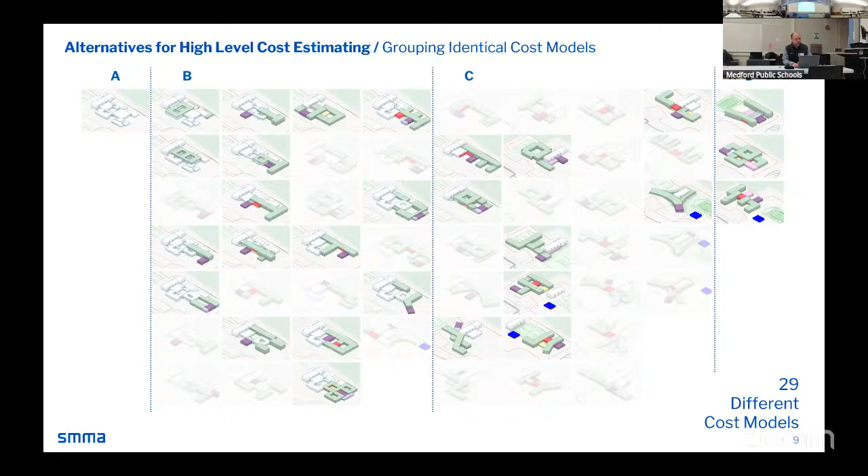We're not going to revisit the entirety of that meeting from last night—that's not the point of this discussion. We just wanted to share that these are out there. We can circle back if people are curious about any aspects as it pertains to this advisory team, but there is some connection between what we talked about last night and what we're going to discuss here.

All right, so I'm going to turn it over to Michael.

It's always good to try to remember what we talked about last time. There's been a lot of meetings between then and now, so it's important to recap. We collected all the information provided, some really good notes, and synthesized that down into a few themes. It's helpful to take the range of things we talked about—from what color the brick should be to who we are as a school, and everything in between. Word clouds are helpful.

The first theme we heard a few times was to do more with less—that we should be looking at timeless design, timeless materials, over trendy things that are maybe flashes in the pan, and that we should embrace simplicity, making choices that are beautiful, materials that look good and exude a certain comfort and excitement for people using the building. On the flip side, looking at life cycle costs and maintenance, which plays into the long-term value of that material and keeping it looking good, not beat up.

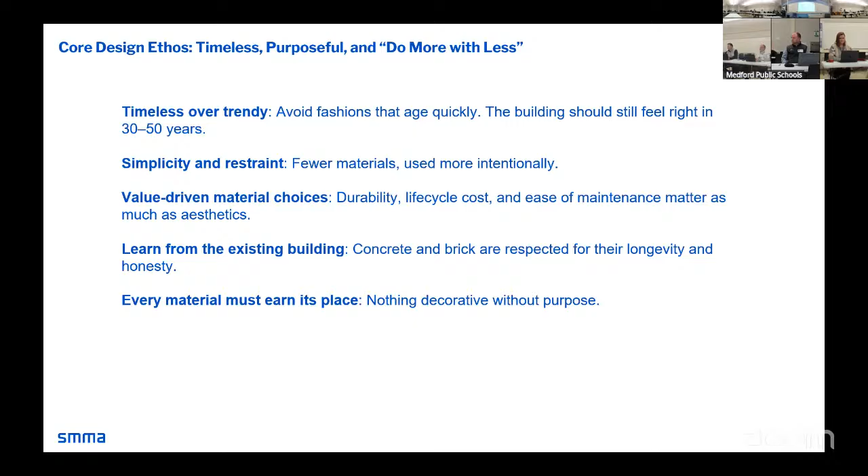The second broad bucket was materials, material health, and sustainability. Many people mentioned going after red-list-free materials, materials low in toxicity, like no PVC or vinyl for the project, stating that occupant well-being and health is paramount—both the physical and emotional side of that.

Maintenance will be a big theme, especially down the road. We're selecting materials for classrooms, hallways, and things like this with movable furniture—it all gets down to how well that material holds up over time, avoiding things like waxing floors, and working with custodial staff to understand how the building is cared for over time.

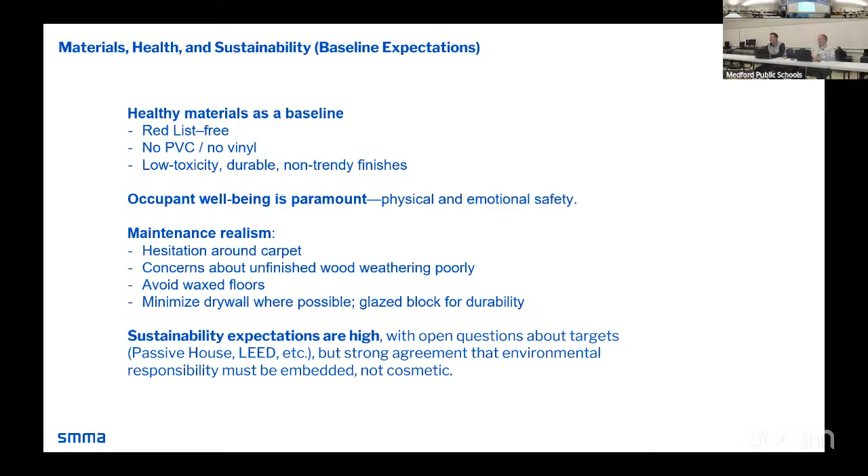Sustainability has always been a very high priority for this district and this school, so that goes without saying. We're investigating scenarios like LEED, passive house, or living building challenge. That will all get discussed as we start creating buildings and sites.

Next big theme here was about the civic role of the building. A lot of it was about what we were just briefly talking about before, the clarity and the site circulation. Do people intuitively know where to go, or do they get lost the moment they make a right turn onto the site?

Some thought that Medford as a city lacks public space, and saw the school, the flagship, as a great opportunity to help fill that gap. Of course, there are a lot of amazing programs here that draw people in, whether it's the pool or the fields.

With the new auditorium and performing arts portion of the project, that's not hidden, but very much part of the public realm, celebrated. These civic spaces are, I like this word, beacons in times of crisis. I might talk about that a bit later when I discuss the civic architecture and its response to crisis.

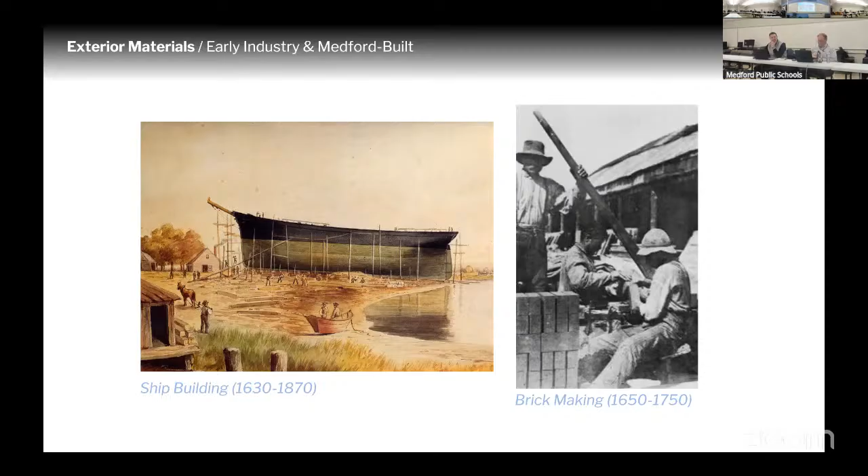Now we'll roll through some civic buildings, organized roughly by era. I pulled out a handful that were mentioned last time, plus some new ones, and some I drove by on the way up here, which was kind of cool.

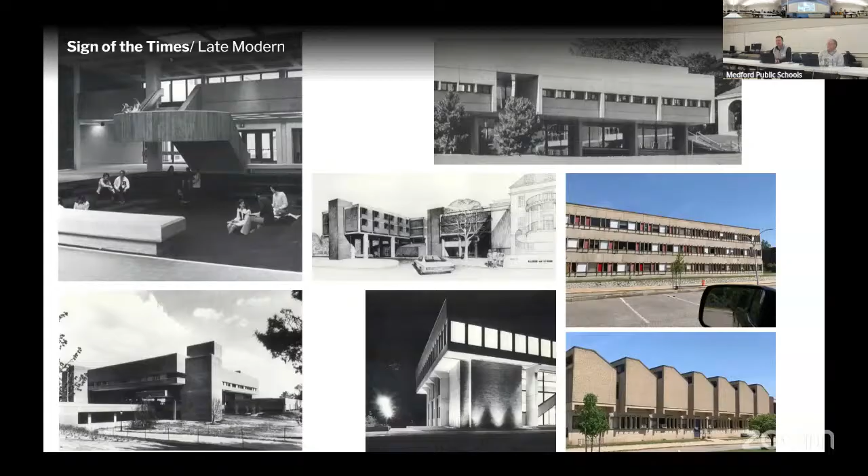There was a really good spread in the yearbook from 1970, a little photo essay that was put together. I'll read through some of these lines: 'As the natural terrain was reshaped by dirt, concrete, earth-moving machines, a man-made beauty evolved that rivaled its own natural order.'

Well, beauty is in the eye of the beholder. 'A world of coherence and order that even nature could envy was excitedly emerging. Surely brick and mortar cannot live and breathe.'

I mentioned architecture responding to what's going on. This is like the Vietnam era, there's a lot of craziness going on. This building, and the previous building had the fire, so a lot of chaos was going on during this time. So probably the school building committee at that time, the architects, were in a search for order and clarity, and that's certainly what they did here.

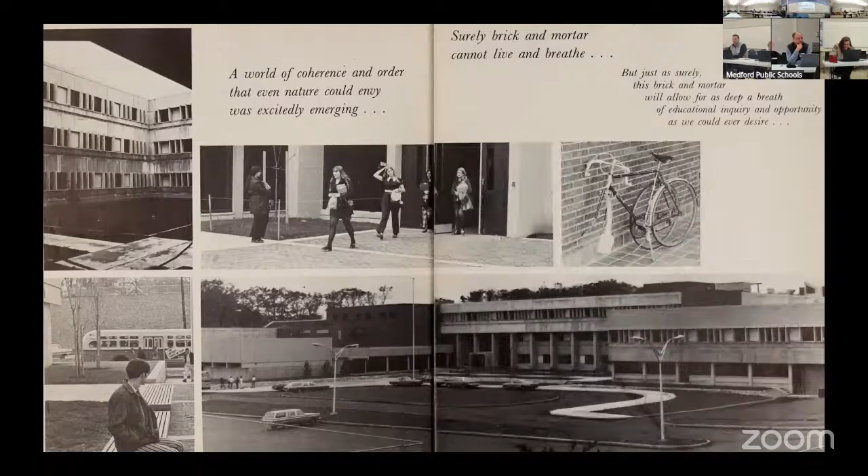From the way the corridors are laid out, to the way the buildings are nicely placed together, pretty regular courtyards, and even down to the system of the facade, there were definitely rules that were applied, whether it be how we treat stairs, windows, or sunshades. Everything was orderly and in control.

This quote by Marcus Aurelius, I think, basically says that, and I think Churchill has a similar quote, that we shape our buildings and our buildings shape us. So that's kind of what we're embarking on: the environments we create and the materials we select all have an impact on the occupants, how they grow, how they learn, and how they connect with each other.

So now is maybe a good moment to pause. Just to throw out this question: having seen some of the civic places, is there a connection between those places and this place? Is there not a connection? What does it mean to be a civic building today?

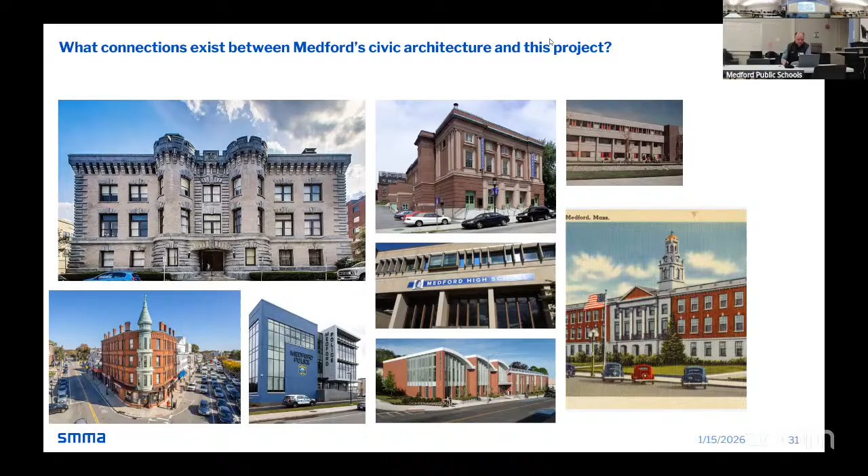As we think about what materials may end up on the exterior of the building, we need to keep in mind, first and foremost, that we're designing and building buildings with a 50 to 75-year lifespan. So at that initial point, it's going to preclude the use of some more residential scale products. We're not designing vinyl siding on school buildings. We're probably not even designing natural wood siding, given the upkeep associated with them. So these are a collection of typical materials.

Brick is certainly one of them, and it's found in the city, as we just showed, and in the district. It's not to say these are the full collection of materials out there. We'd love to hear about other materials anyone has experience with or interest in, that we can investigate and move forward in the process.

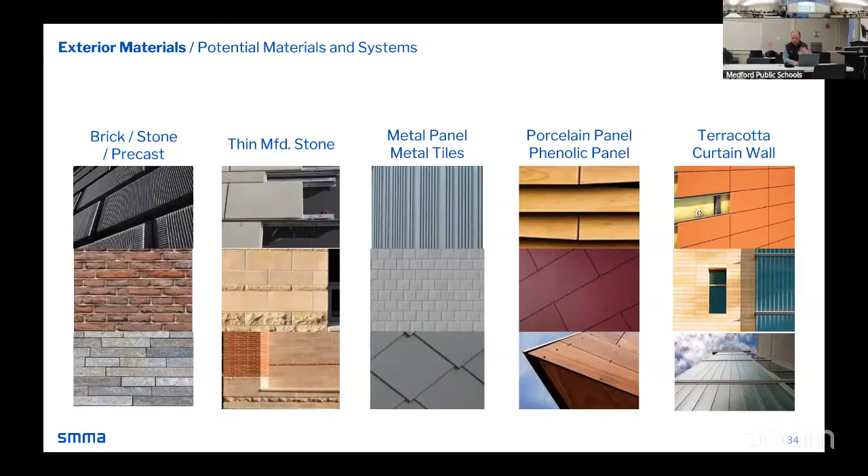And again, these are just the opaque materials. We haven't even got into the topic of fenestration and what the things that we look through are made of.

But sticking with fenestration -- yeah, fenestration, which is again a fancy word for window, essentially. So maybe I'll try to stay on the simpler side of the terminology, but architects, we like to trend into all the fancy words that we know, and I'll try to check myself on that. Now I know how people feel when I'm talking about technology. It's similar, yes.

So I talked a little bit about the cost spectrum in terms of materials, but also the durability of materials that we go through in terms of how we can plot where different materials fall on this range. So we have durability as our range on the top left there, and then cost running across the bottom.

You can see that masonry or brick has that interesting position of being extremely durable and having a lot of longevity to it, and also being on the lower price point. And that is the very reason why you see brick on so many public buildings, because it fits into a lot of beneficial categories that way.

There's a lot that we can do with brick. There's a lot of creativity that has been investigated over the course of history with that. So it is a material that can be considered as part of the exterior palette as we move forward. But again, you get a sense from looking at this where some of those other materials fall in terms of that spectral graph that we've been looking at.

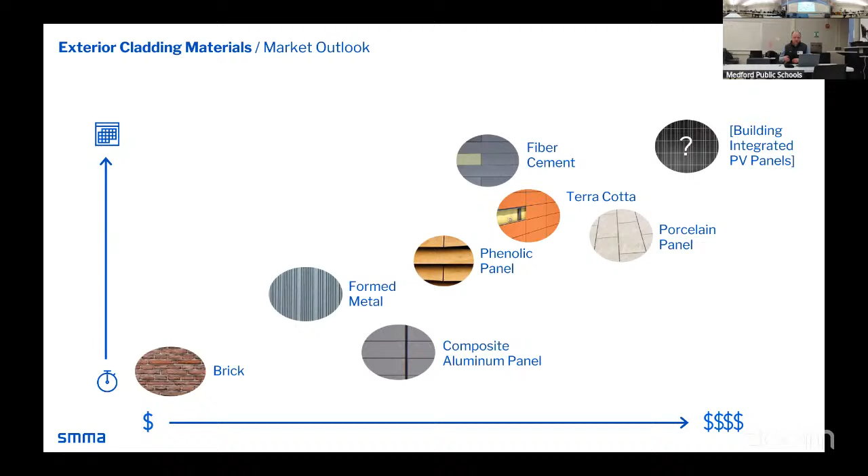And the one in the upper right-hand corner is maybe a little bit more interesting in terms of building integrated photovoltaic panels or solar panels actually applied to the face of the building. We don't see that too often around in terms of public school buildings in Massachusetts, or really too much within the country, because it is at the upper end of both the first cost investment of what goes in there, and also in terms of durability, it is not going to last quite as long as an active technology than some of the other materials.

But saying the lower on the graph, the more durable? Correct, yeah. And then to the right-hand side, being more expensive.

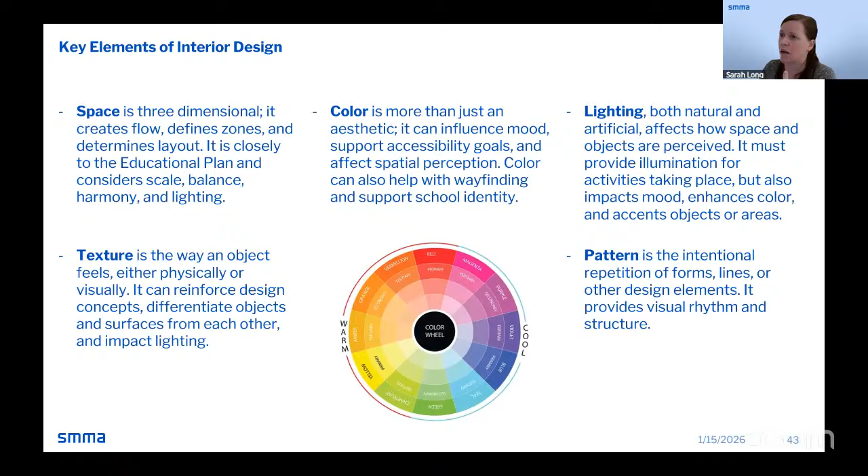And it also has a big impact on color and mood. The other two I wanted to touch on quickly - often overlooked, but a layer that can really make an impact - are texture and pattern. Texture can be physical touch or something you perceive visually. Pattern can be a repetition of lines, but it's also a rhythm that you can feel within the space. That's something we'll look at as we move into the next slide and the goals we're looking to explore.

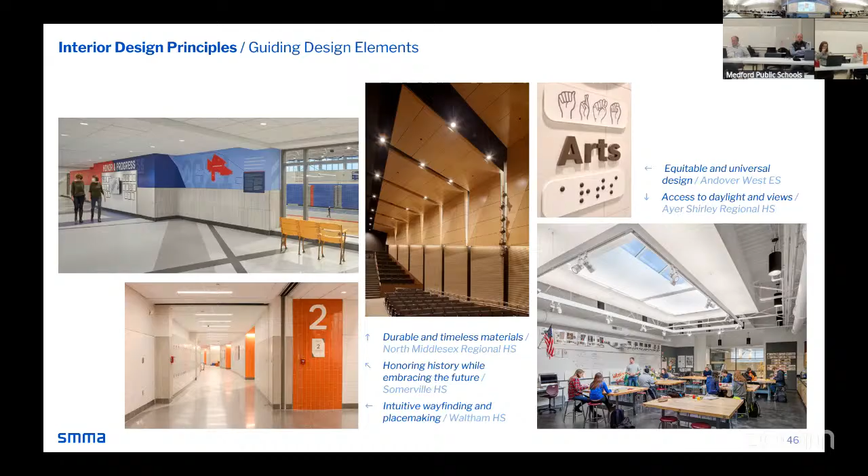Well, jumping off what you said at the beginning about doing more with less and not having anything decorative without purpose - I'm looking at some of these slides, and the celebrating diversity one is absolutely beautiful, and there's one on the next page, the hallway in the top left. They're beautiful, but I'm thinking of students with visual impairments, and with a lot of different colors and patterns, coming in and feeling sensory overload from just a visual perspective. Going back to the celebrating diversity slide, those colors are gorgeous, but I'm also looking at those white tables and how they blend in with the floor. If you're distracted by all that color above you, you could walk straight into the table.

That ties in with the wayfinding too - that helps the same with the floor, making it intuitive. So that's one thing that jumped out at me, keeping that in mind.

For sure, that's great feedback. Definitely, I think finding that balance of making things comfortable for everybody, and to your point, being intentional about where the accent colors are, what the contrast is, and actually making sure we are achieving that goal.

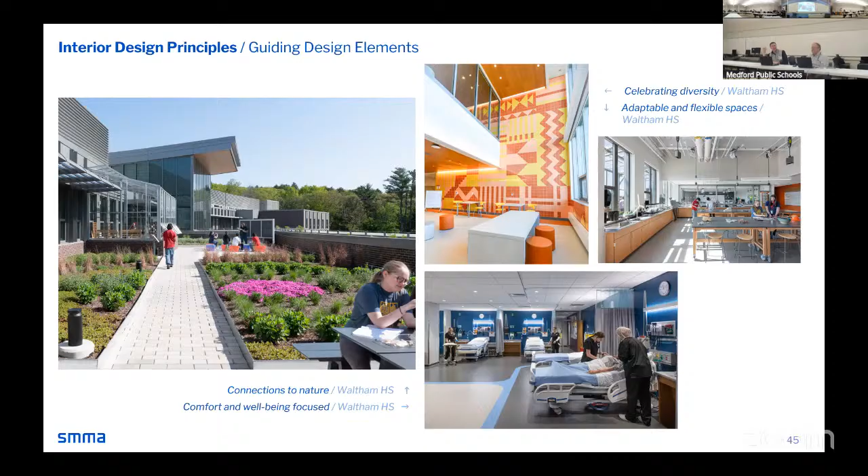Sometimes it's also about how you shape a large space, that there's nooks and little spaces, so you're not in the middle of it all. I know at my daughter's school, when I first walked in, it had exactly what you said - it's a 90s school, so it had a checkerboard pattern, very overwhelming, gaudy, and it's just a space that is all visual energy everywhere. So it's like trying to sculpt spaces in a way that are proportioned well, lit well, and have an interior palette that supports a pleasant and navigable space.

We can skip the environmental graphics if you'd like, Matt, and come back to it - I just want to let people know that we're skipping over something still very important, in terms of talking about healthy materials and red list avoidance of materials. We are going to get into that a little bit in the next advisory team meeting if you want to stay for that, but it gets back to this topic that we're not talking in silos here - we're overlapping consideration of materials.

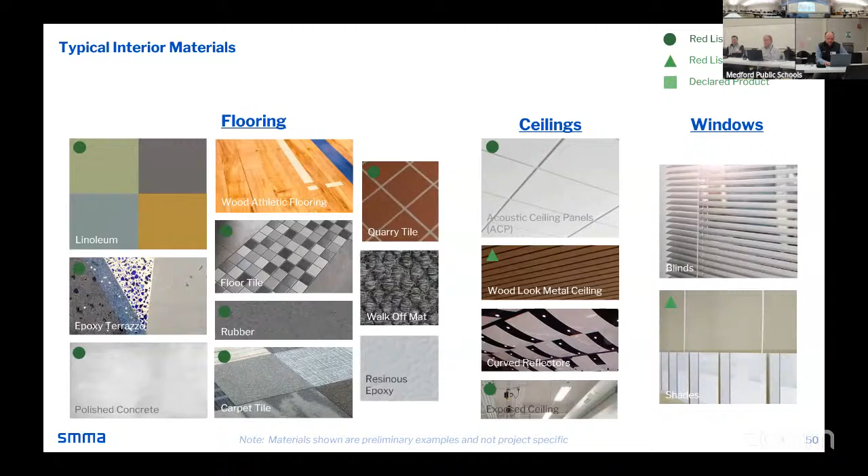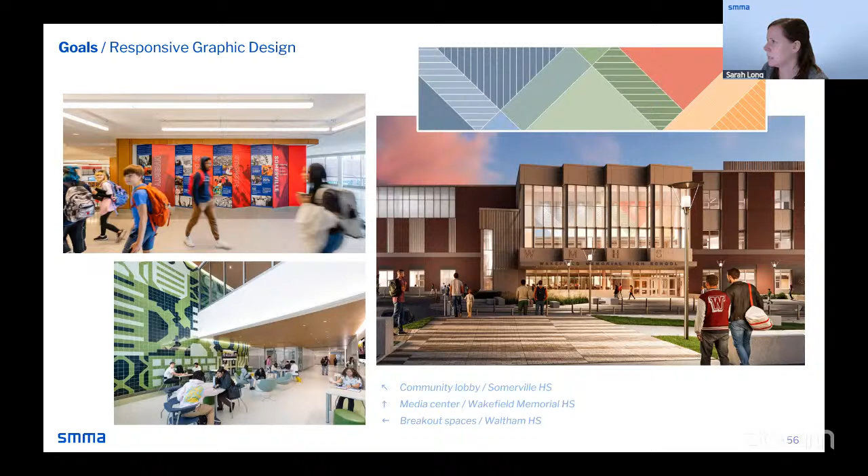Let's see, the next slide we can talk about. So these are some great examples of creating educational opportunities, again, based on some context.

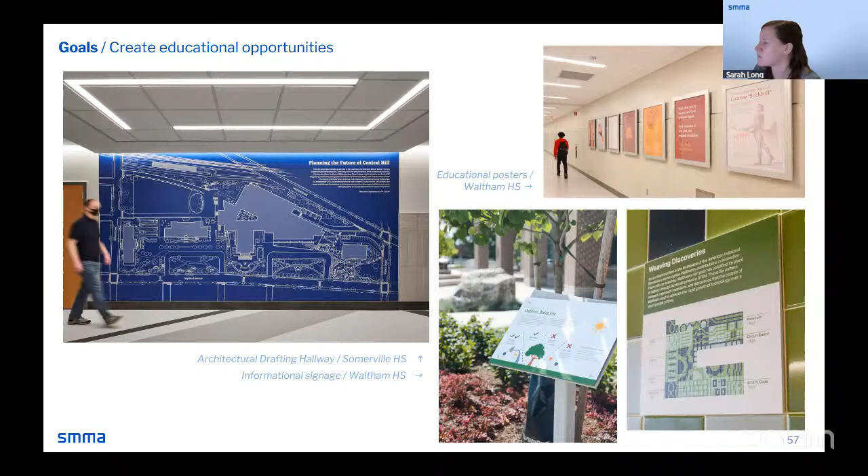We have a graphic in the architectural drafting hallway of Somerville that really highlights the entire plan of the space. And then we've got informational signage for those tile murals we were talking about to explain what you're really looking at, what are the parts and pieces, as well as some LEED signage, just to better understand what the building system is actually doing.

And this will really be one of maybe like a splinter group that comes out of this, and we'll probably work to try to find some student voice to pull into this, because it's really critical to making sort of any experiential graphic connected to the school community.

I think we've heard that in a variety of ways already, and Suzanne mentioned at the beginning that the student input is just critical, and it's been very insightful to date wherever we've been able to make those connections.

The other thing I'll add on to the end of Sarah's piece here is the fact that there's actually a lot of experiential graphic activity already in the building today. Particularly the CTE programs have been very prolific in terms of generating some amazing things that are on the walls, either outside their shop spaces or inside their shop spaces.

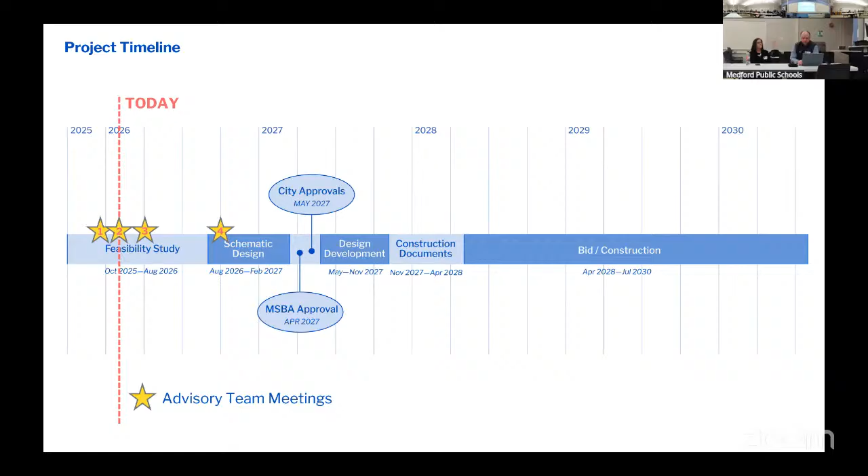Fall 2030 is our target school opening date at the moment. We are very much not quite there yet. We're at the beginning of this feasibility study process where we are right now.

But at the end of the day, from these advisory teams, there will be a series of recommendations that we're going to be sharing back to the full building committee. They will have the ability to accept or not accept those recommendations. This is the process for collecting expertise and input really from experts within the community on these particular topics.

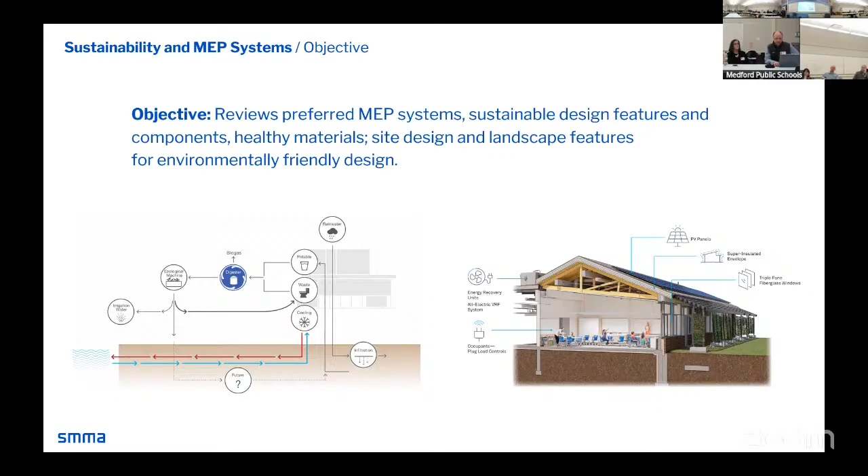Very quick refresher on the objective of the topic we're going to be talking through, but I think this one is very self-explanatory in terms of the title of the advisory team. And then we're going to jump right into topics and priorities. I'm going to hand it over here to Martina to start off.

So we're going to browse through some of these. We've got it all there, but I'm not going to name them one by one. At the last meeting, we went through the givens, the specialized code, the MSBA requirements, LEED, etc, and then the Medford sustainability policy and guidelines.

And we got a good amount of your great feedback and discussion points at that meeting. What we did is we organized them. There was one particular comment about understanding what LEED is and giving a LEED overview, so we'll do that briefly and have a bit of a discussion around that. This is not to go through the whole LEED set of criteria, but you will see that throughout the topics we're going to go through, some of those are going to fall

within the following discussions: climate resiliency, so we sort of bundled in there, obviously energy efficiency. We're going to talk about mechanical, electrical, plumbing systems. Operations and maintenance was something that was near and dear to some of you. We're going to brush a bit on passive design strategies - Sarah, thank you for bringing that up, because that's something that's going to be part of the project in terms of resiliency. And then renewable energy, EV charging. There was another set of comments around embodied carbon, so we're going to spend a bit of time talking about this today.

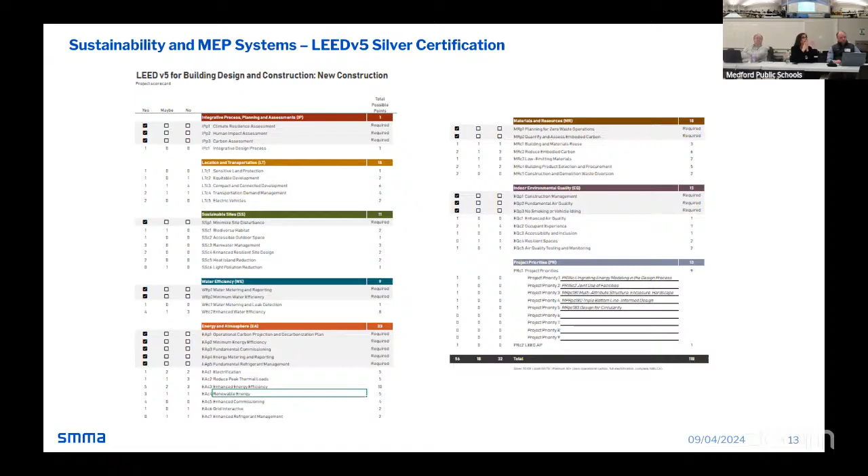So just one very early look at it: in order to get to silver, we need 50 points minimum through this criteria. We did a very preliminary assessment, sort of targeting more than 50 to make sure we get 50.

And then there's options here to go to either gold or platinum. I know in some other meetings there may have been comments about gold or platinum, and that's not something we are going to decide for you. We want you to voice your wish, and then we're going to analyze and show you what it takes to get to gold or platinum.

To clarify further, I think we want to be clear about what our sustainability goal is and why we are looking for a particular rating. The silver certification through USGBC is going to get us MSBA funding, so that's a clear goal and rationale for that. If we're going to gold or platinum, are we interested in just that designation or recognition from USGBC, or are we interested in the core sustainability benefits behind those ratings and what matters as we move forward in the process? It's a higher level question, but worth some discussion.

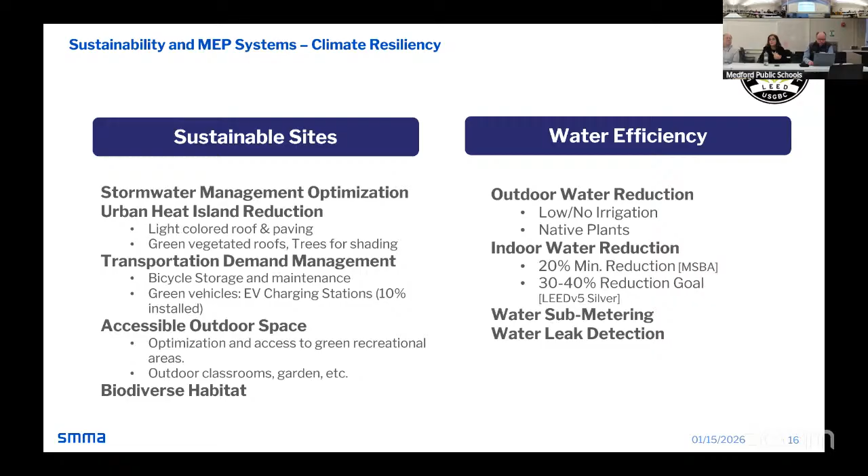Next. In terms of energy and atmosphere, we want to spend a bit of time because there was a lot of talk around this last time, and it's a big chunk. Somebody just made a comment about net zero energy.

So in terms of LEED, we have to outperform standards that are part of their criteria, and MSBA looks at that performance and associates a certain amount of LEED points to it for the stretch code - they're kind of apples and oranges, but that's their way of benchmarking. So we really try to optimize the energy performance of the building to meet the MSBA threshold, but also make as many points as possible. The change in LEED V5 is source energy - we won't go into all those details, but it's source energy based versus site energy based.

All of this is supported by the MA specialized stretch code, so there's a lot from that code that's going to support the criteria there. That said, there's a lot of technical things here, but passive strategies are going to also be a priority, making sure we harvest the free sun. Emily will talk a bit about that, thinking about wind at the same time. Somebody brought up passive survivability, so that will be part of the thinking here in terms of HVAC system and overall resiliency of the site.

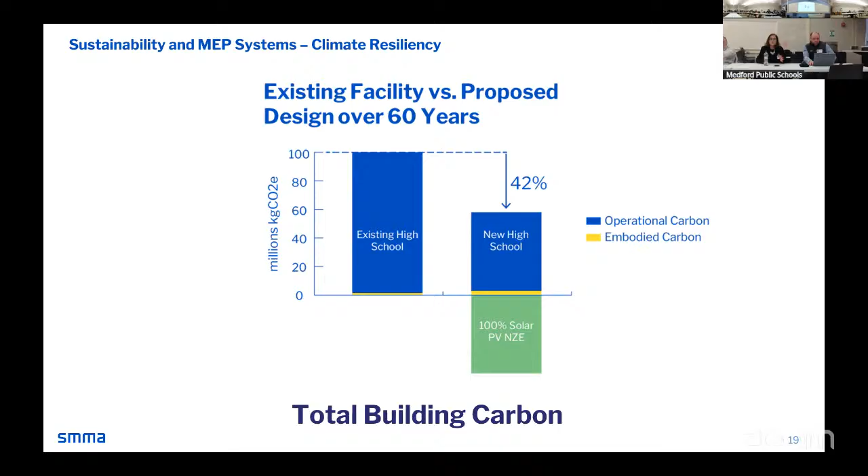In terms of operational carbon—all this energy, we're going to talk about embodied carbon later—all this energy is equivalent to greenhouse gas emissions. This is not your school, this is an example: when we fine-tune your existing high school energy better, we're going to create a bar chart like this and show you where we're looking to go. What you're seeing here is a large existing high school and how an EUI 25-30 target reduces the operational carbon over 60 years. We take the annual emissions and multiply them by 60. The reason we do that is that when you do modeling and measuring of embodied carbon, you look at it over 60 years. This discussion will continue at the next meeting, probably in more detail, but we like to look at carbon as total carbon, both operational and embodied.

So like Martine's been saying, when we're designing our spaces, we're not just thinking about what is code required, what the minimums are. We're thinking about a big picture and a lot of different variables. So this carries over into the engineering systems as well. I was glad to hear a lot of these points were mentioned in the first meeting, so that's great to hear that you're all thinking about all these different buckets that we think about during our design process.

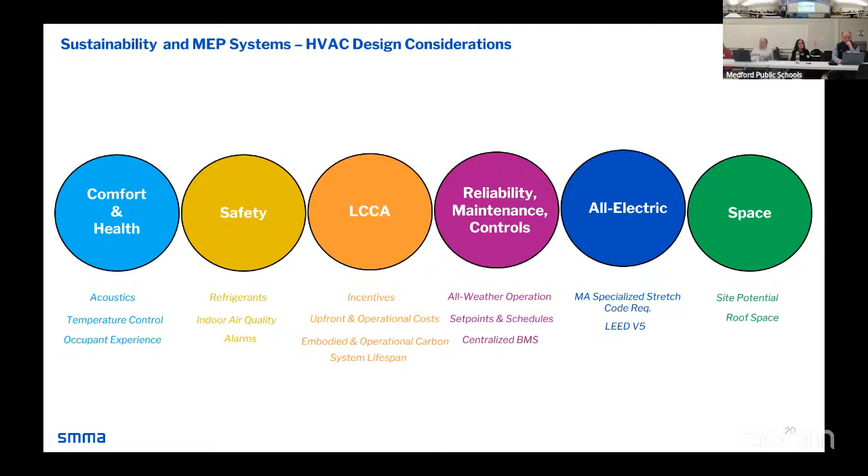Specifically for the mechanical systems, I'm thinking about the comfort and health of the occupants, the safety of the materials that I'm using, the LCCA as Martine mentioned - both sustainability and the engineering teams have to consider this. Reliability and maintenance of the building systems is very important. The all-electric HVAC systems is a code requirement and a LEED V5 requirement. And then also just the space, not just within the building, but where we're going to place our equipment on the roof - is it sharing space with the PV solar panels? And where are we going to take up space on the site? So we have to coordinate with the civil teams and the site teams as well.

And then I just wanted to point out this one in particular, which was brought up quite a bit in the first meeting, and again I'm very happy about that, because it's one thing to design a high efficiency, beautiful mechanical building system, but it's an entirely another thing to see it operate as intended. So it's very critical from the beginning of the design process to work with who's going to be operating your system.

So Andrew and I have already met with Ken and John from their facilities team to understand how they currently operate, what they're comfortable with, and then for their future - what if they'll be bringing on board more team members to handle the larger systems, or if they're going to incorporate more training to understand these all-electric systems and controls, because it's very different than what's currently in the school. And then, as Martine mentioned, we also look at commissioning as a LEED V5 requirement.

So Audrey, I do see your hand up. We'll circle back to you when we get to the question point in this sort of grouping of slides, which will be coming up. Okay, and then a little bit touched on in the first meeting was specifically the mechanical system options.

We're going to dive deeper into these later on in the feasibility phase of the project, but I did just want to quickly bring them up high level for what our all-electric system options might be for the school. So the first is a ground source heat pump system, that's a geothermal system. The next would be an air source to water heat pump system. And then the third would be an all air source heat pump system. And then with these three, we can also kind of do a hybrid option where you can take bits and pieces of the different system types and use them for different areas of the school.

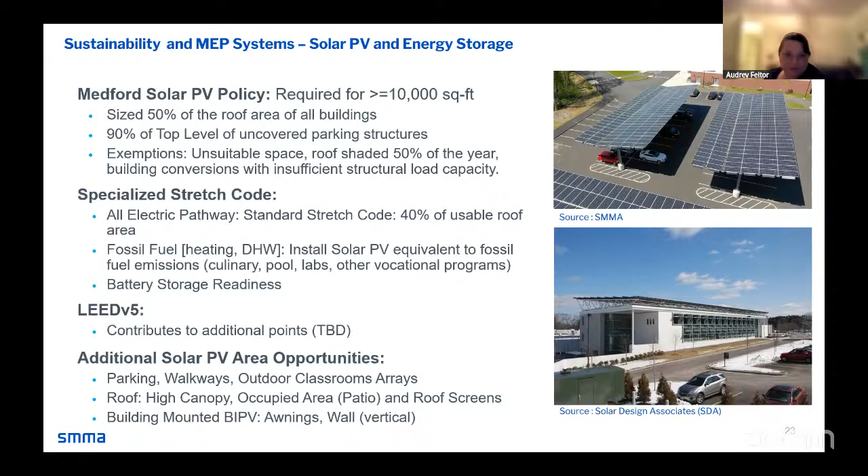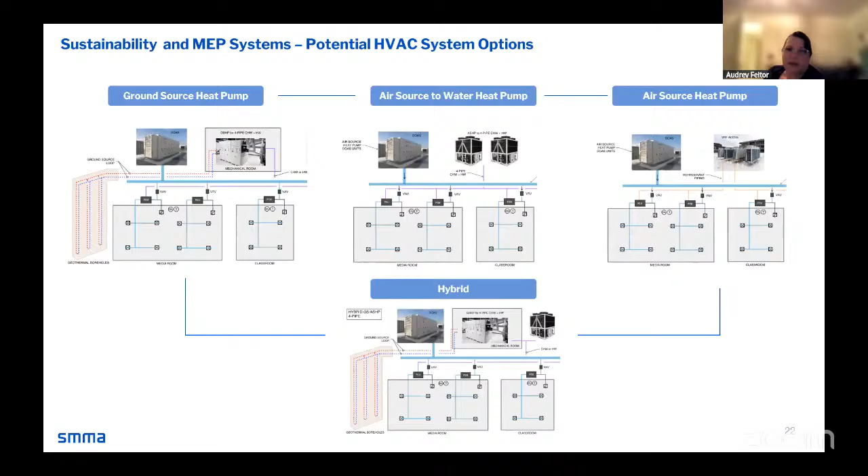Yeah, thank you. I wanted to go back to the HVAC stuff, so I feel very compelled to speak up about this. Speaking as someone who has been in that building over 25 years, I can say this is a huge point of contention, because as you all know, the building is old. The amount of years of not just me, but every teacher having to deal with the uncomfortable conditions in that building is horrendous.

Now I am lucky because I'm in the science wing, and that was redone about 11 years ago. However, what's upsetting is the first few years they let us have individual control over our rooms, and then that was taken away. And now currently there's something weird and wrong with the system, and they can't seem to control it, something weird about the central control. My room is set to over 75 right now and I'm dying in it. Today was kind of warmer and I've had to crack my window, and it kills me because I know what a waste of energy that is.

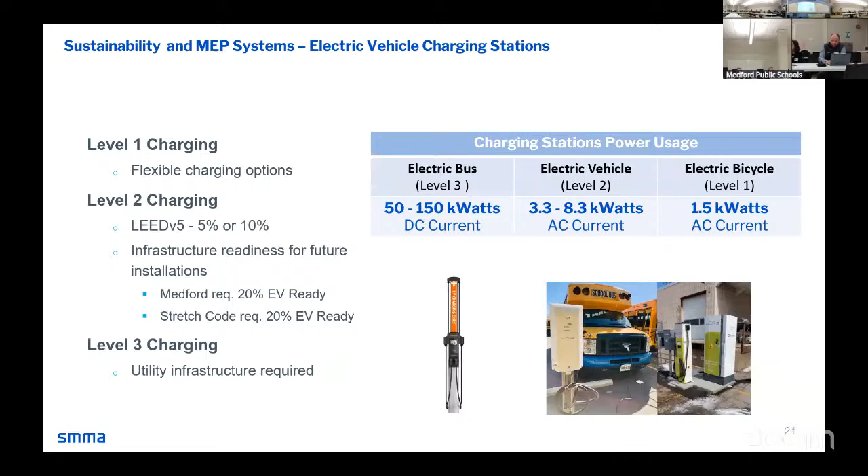Now to the SMMA team, my question. We saw 57 concepts yesterday, and I know that we had some sort of initial, I'll say, just impression gathering.

But certainly some of the shapes that we saw, and some of the aspect ratios, imply to me that there are concepts not well suited for things like PV deployment or potentially other technologies, whereas others will have better inherent attributes. I wanted to ask if all 57 are going to be assessed for the kind of technologies we're looking at, or will we delay that assessment until we narrow it down?

Could you walk us through where this subcommittee merges with the main line to have its impact? So first, we're at 29 versus 57, which, if it makes me feel a little better, 29 is still a big number. What we're going to be doing as we go forward is definitely add solar suitability, or whatever the terminology, into the overall evaluation criteria that the building committee, and consequently this advisory team, uses as a lens to look at the different options as we move forward.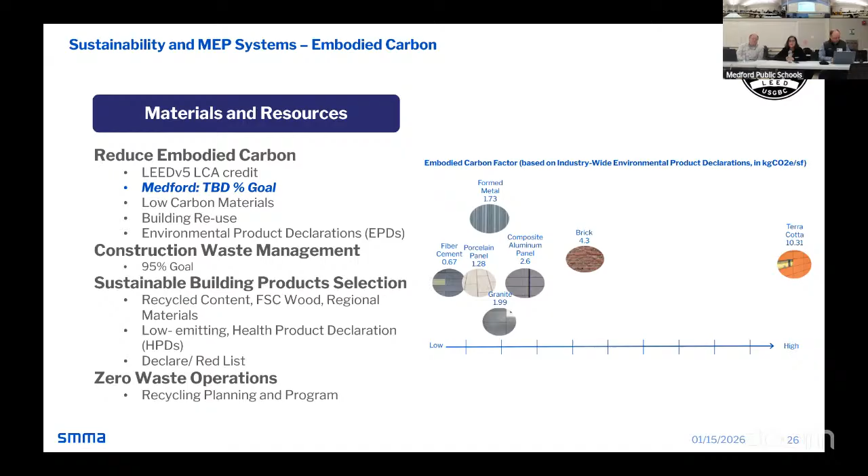To be very brief, LEED is going to include a lot of sustainable materials, looking at waste, and there's also a requirement for embodied carbon, so there's a minimum there. What we want to look into, and continue to look into, is going beyond that minimum as much as feasible.

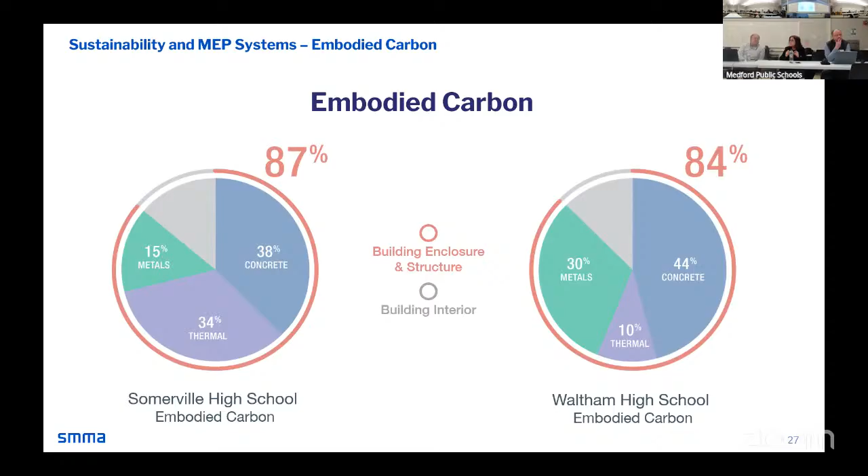When we look at materials, exterior materials, we start looking at embodied carbon impact. A lot of the embodied carbon resides in the building enclosure and structures. There's a focus there, but that's not to say we won't look at other materials—for example, ceiling tiles and gypsum are pretty high carbon as well, so we'll look into that.

So: low carbon concrete, structural steel with high recycled content, low carbon insulation material, gypsum ceilings, and others. The one other thing we'll discuss is that we're curious to understand from you if you're interested in considering mass timber and wood structural components, whether a full structure or a hybrid approach, which is something we can look into. Mass timber obviously has an impact on reducing embodied carbon.

That's it, we can pause there for a second and get your input from there. And just to add a little bit of more specific commentary on the building.

We've had some initial discussions with our structural engineer, understanding that we have about a 15-foot by 15-foot structural grid at work in this building where we have the concrete frame portions. That structural grid dimension actually works pretty well with a mass timber structure, if we're thinking about expanding horizontally or even vertically on this existing concrete structure. Not all the building is concrete structure - there are portions that are steel framed, like the vocational wing, the gym, the pool. So it's already a bit of a hybrid structural system. But there is some inherent compatibility between the timber frame and the concrete frame as it exists today, just for what that's worth.

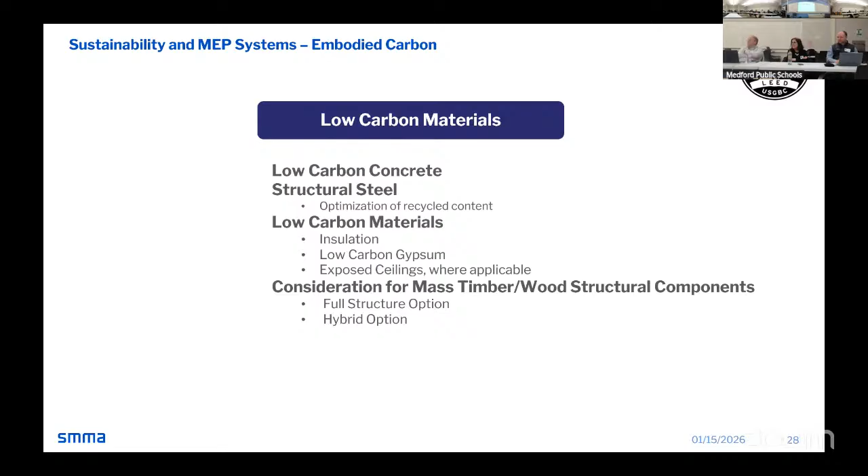All right, the last comment, and I'll move on. Okay, we can always come back to it too.

All right, healthfulness. So let's try to go quick. Last meeting there were obviously comments around daylight being maybe challenging or limited in this current structure. The new design will definitely optimize access to views and daylight to the majority of the classrooms and program space to the extent possible, whether it's side light or, in some places, top light.

And then air quality was another topic, so there's going to be more talk about ventilation quality. Just quickly, LEED has a set of criteria that brings high environmental and high indoor air quality, so all of those will be part of the project. And then occupant experience in terms of interior lighting, acoustical, thermal comfort, all of those are also inherent in LEED, but that's not to say there won't be discussion and criteria beyond LEED brought up as part of the design.

Operable windows, for example, passive survivability that was mentioned earlier on. There's potential to look into mixed mode, using outdoor air when possible and natural ventilation when possible, etc. And then the construction indoor air quality practice - there's a whole set of LEED requirements that look at construction practices and require a set of practices that help indoor air quality.

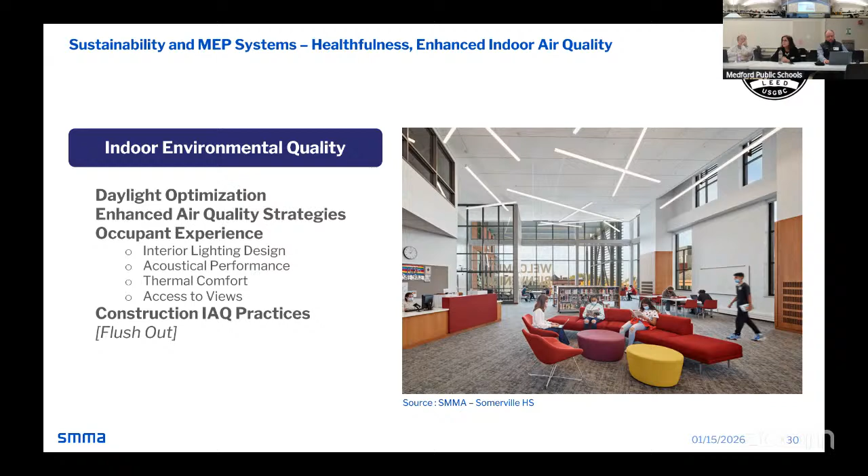So cleaning and flush out is big, and then there's testing as well. And then healthfulness beyond LEED - LEED requires red list materials at a minimum. We're currently applying red list material to a very high level in other projects, so we're looking forward to sharing that expertise and those opportunities. And that doesn't mean the cost concern is gone, but it doesn't mean it's going to cost more - it's about vetting the right materials.

Biophilia - we talked about flush out, and then there's a whole component of healthfulness tied into the site. The site discussions are going to address this. We're not going to go in detail about this today, but they're very much looking at the major opportunities offered with the proximity of the Fells and the landscape around. And then environmental literacy - we talked about outdoor classrooms a bit, that was brought up as well. Green vegetated roofs was something that was brought up that we'll talk about. And then we usually do a quite extensive set of signage, which combines all of the sustainability criteria throughout the school with imagery and language that can support the educational program.

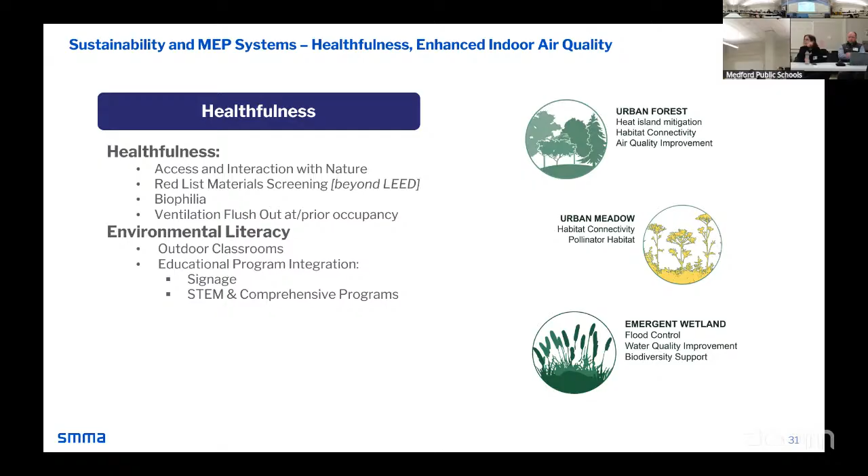So when we get into the LCCA, I can explain that. It's too bad he had to leave, but hopefully you'll watch the recording, because we're gonna talk about this. The incentives are something we need to make sure we pursue upfront, and we'll probably be connecting with them.

Towards the end of feasibility or right at the beginning of SD, there needs to be a connection soon. That's right, I don't want to monopolize this, but there've been a couple of comments about fees, or passive house. Passive house certification, sorry.

There was an excellent webinar on that through BE Plus the other day, which is architects' jargon for extra learning credits. I think we should talk about this here as a serious topic, because there are a lot of soft costs added that will make it, that I'm not sure people really understand. In terms of energy modeling, you were the expert on the team, but I know that versus TEDI can be tricky in trying to convey what that means to everyone.

Yeah, this school is over 0.5 CFM per square foot, so we can curb around TEDI. Okay, well that's good to know. But we absolutely can, because we've done that, we have an idea of some of the cost of passive house, so we can bring that in as an item, because it was brought up, and we took note, and we can certainly.

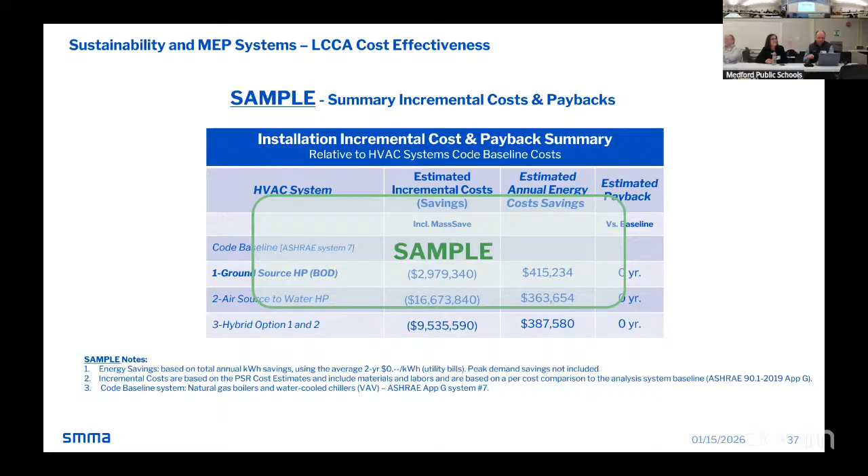So the life cycle cost analysis, this 50-year life cycle cost analysis, is required by MSBA. It's not just comparing the systems, it's comparing the whole building: enclosure, electrical and mechanical. It looks at first cost, which is installation cost, and replacement cost throughout those years. So it touches on some operating costs and maintenance costs on top of energy costs. All of those are combined over 50 years. We put in cost escalation. We also look at upfront incremental costs, comparing the systems, including the fossil fuel, and we also add on potential incentives.

I'll leave it at that. We can talk a bit more at the next meeting, but it's pretty comprehensive, and I think it will help support the conversation about systems.

Okay Jenny, go ahead. Thanks Matt. I just wanted to flag a couple things and thank everyone for their thoughts. There's been some really interesting things discussed, and I'm not an expert in this area, so I'm definitely learning a lot. The two things I wanted to flag are that when the school committee commissioned the building committee, they did set forth a goal of LEED V5.